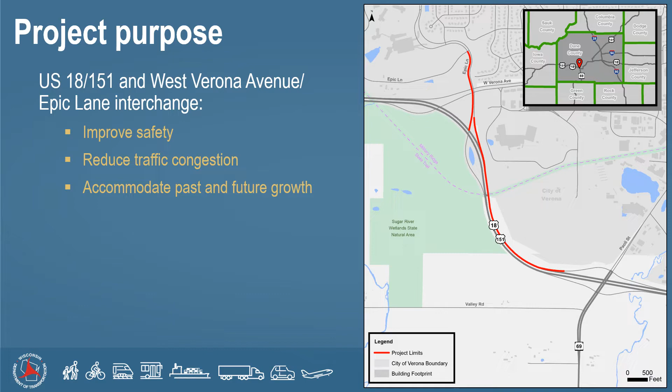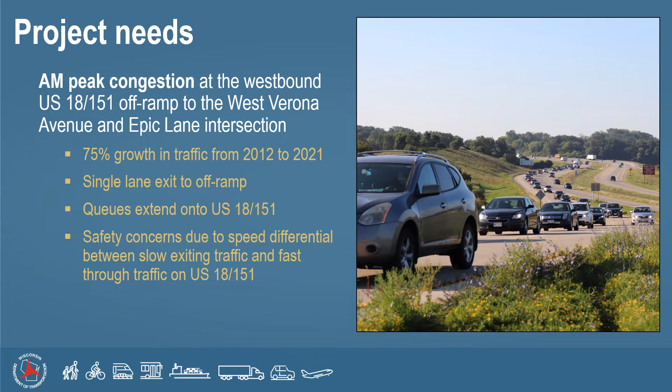Two alternatives were considered to address the congestion and safety concerns at these locations. The first alternative includes no improvements beyond routine maintenance to the roadway. This alternative would not address the traffic and safety needs previously mentioned. However, as for all WisDOT projects, the reason for considering a no-build alternative is to provide a baseline for comparison to the other alternatives.

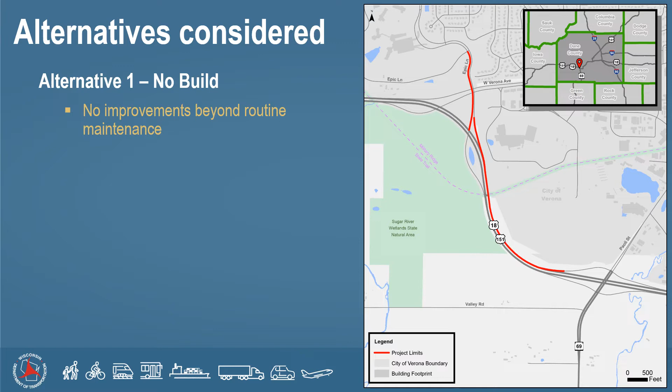The second alternative consists of multiple capacity improvements to reduce congestion. For the AM peak, an auxiliary lane is proposed that would extend from the westbound on-ramp from Wisconsin 69 to the off-ramp for the West Verona Avenue and Epic Lane intersection. This auxiliary lane would remove vehicles from the US 18/151 through lanes that are backed up waiting to take the off-ramp. Removing these vehicles from the through lanes helps to reduce conflicts between the through and exiting vehicles, which are traveling at different speeds.

The second part of this improvement would shift the existing westbound off-ramp for West Verona Avenue and Epic Lane further south and add a second exit lane. This would allow more vehicles to exit US 18/151 via the off-ramp. Together, these improvements would help reduce the backup that occurs in the AM peak during the work week.

Improvements would also be considered to assist with the PM peak congestion that occurs southbound on Epic Lane through the US 18/151 and West Verona Avenue Epic Lane intersection. The first of these improvements would include adding a second southbound lane on Epic Lane to allow for two southbound through lanes through the US 18/151 and West Verona Avenue Epic Lane intersection.

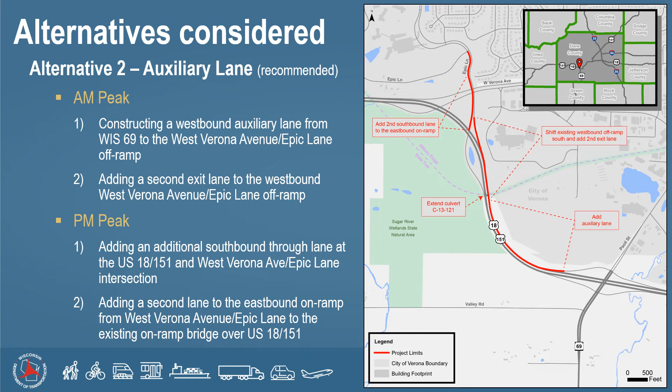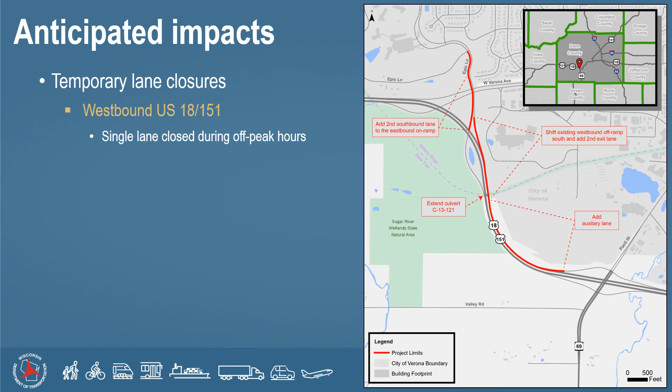To construct these improvements, temporary closures and detours would be required. A single lane closure would be required on westbound US 18/151 within the project limits. The lane would only be closed during off-peak hours to help maintain traffic flow. Additionally, a temporary ramp closure and detour would be anticipated at the westbound off-ramp to the West Verona Avenue and Epic Lane intersection. The closure would occur for 2 to 3 nights, with the ramp opening back up during daytime hours. Lastly, the westbound on-ramp from Wisconsin 69 would also be closed and detoured for approximately 2 weeks. Additional details about temporary closures and detours will be shared prior to construction.

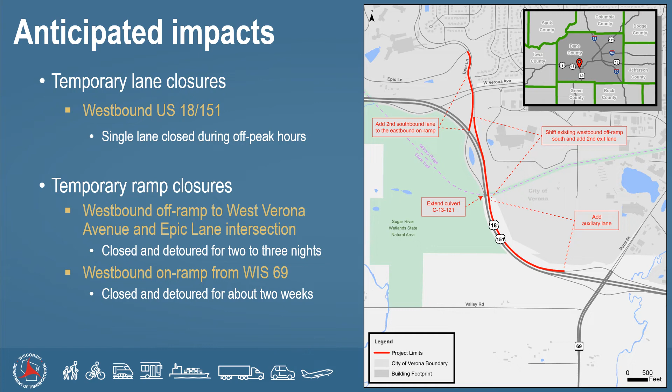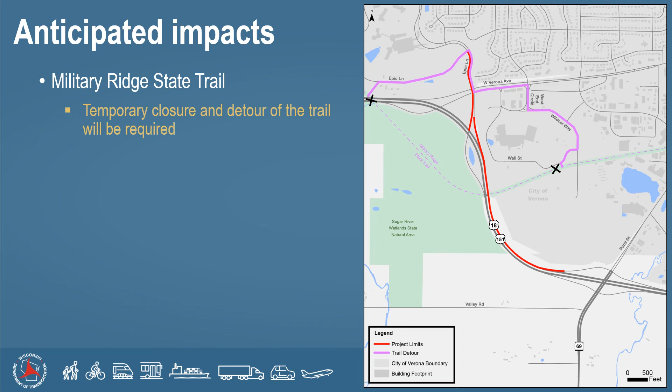Closures are also expected to occur along the Military Ridge State Trail, a bike path for commuters and recreationists. The closure would be required to extend a nearby culvert in order to accommodate the new auxiliary lane. During the closure, trail users would be detoured as shown on the map to the right. Barriers and signage would also be posted to assist with this detour.

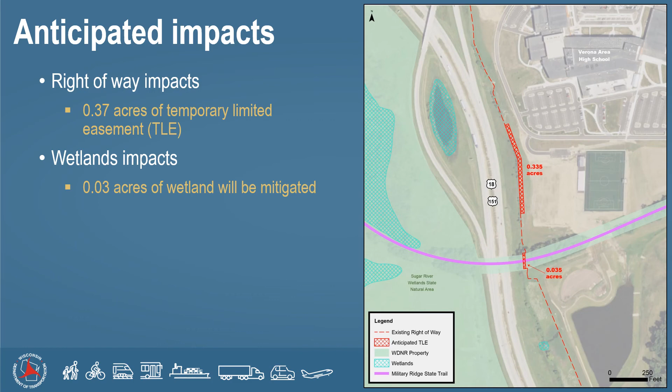Some right-of-way and wetland impacts are also anticipated as a result of the necessary culvert extension and overhead signage modifications. Right-of-way will only be necessary via a temporary limited easement in order to complete the improvements. Impacted wetlands will be mitigated through coordination with the Wisconsin Department of Natural Resources.